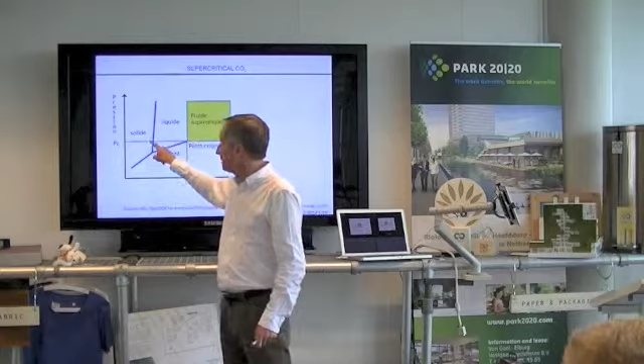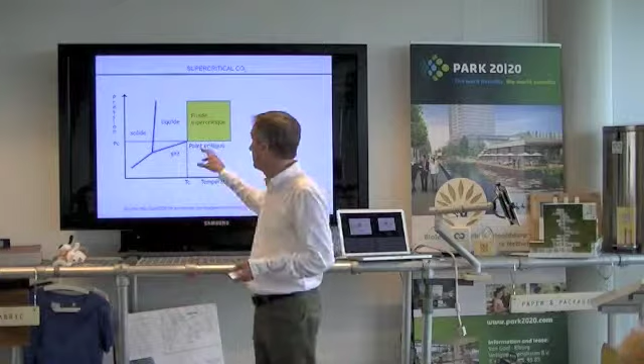Supercritical CO2 is—I'm sorry for the French, but we first explained this in Paris and I haven't had a chance to translate it yet. So this vector is pressure and this vector is temperature. At a pressure of about 72 bars and a temperature of 31 degrees Celsius, which is basically just a warm day, CO2 takes on a unique characteristic that is halfway between a gas and a fluid. That's called supercritical, because it reaches a critical phase. And something happens to CO2 when it becomes supercritical.

It becomes a wonderful solvent and a wonderful lubricant—a fantastic product. Because of that, it is being used now to replace toxic solvents in all kinds of cleaning processes, for example. There are literally hundreds of uses for supercritical CO2, and not just in the chemicals industry.

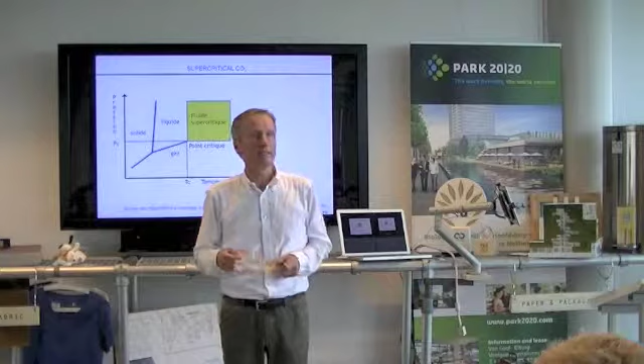It's also used in the energy industry, because when you pass through the supercritical point, you have a thermal transition that allows heat exchange, which means you can use supercritical CO2 to store and use energy. So imagine the implications for the solar and wind industries if you can store the energy generated when people don't need it, and get it back using CO2 as a storage medium. So we're using a climate change gas in a closed cycle to be able to store and reuse energy from renewable sources. All right, so that's supercritical CO2.

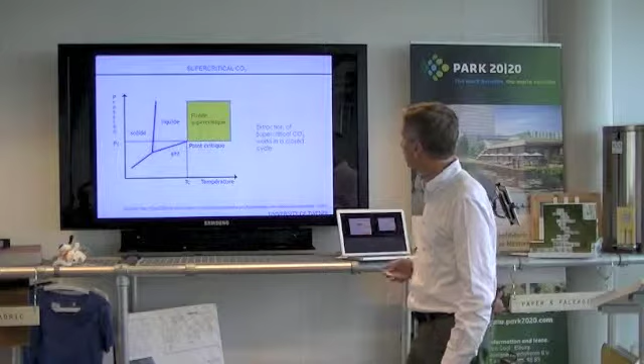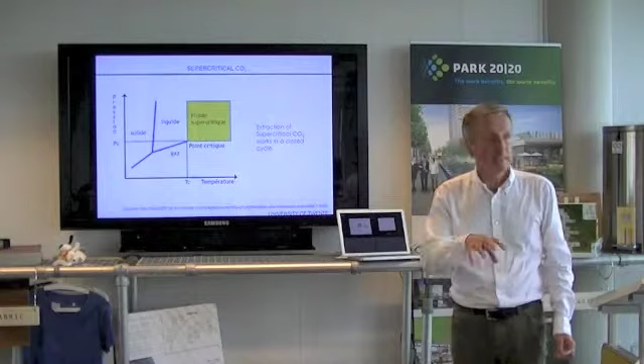And it works in a closed cycle, so that means it becomes a technical nutrient under cradle to cradle. It operates in a closed loop, and what that means is we can capture it and keep it without releasing it to the atmosphere.

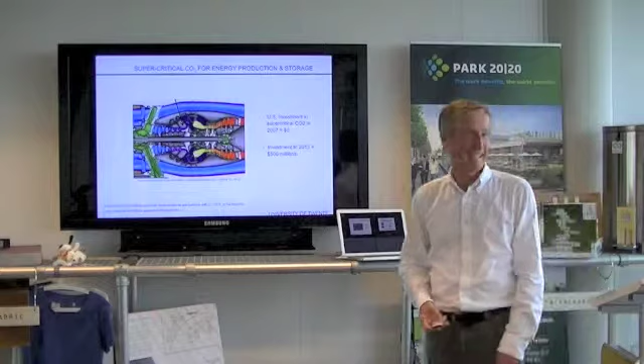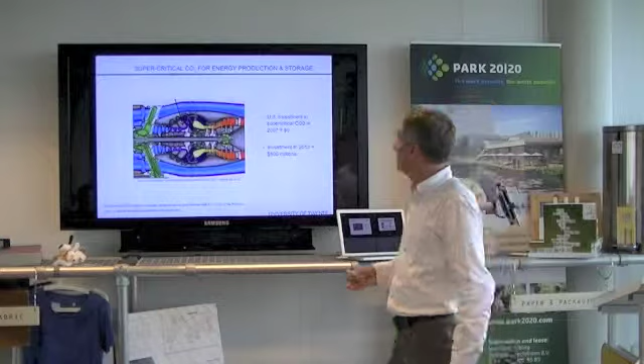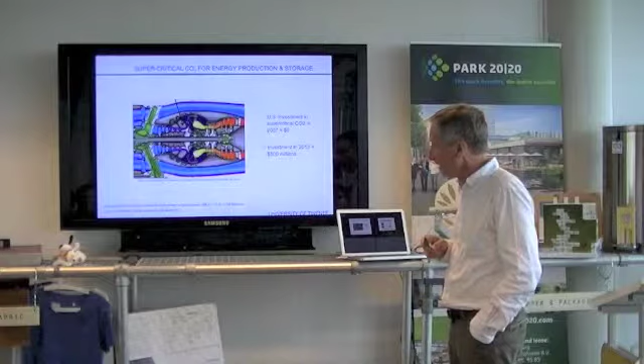People look at that and say, no, no, no, that's not true, this can't be, it's impossible. All right, so from the energy point of view, this is not the diagram of the human reproductive system. These are not kidneys, right? These are combustion chambers. This is an actual working model of a turbine manufactured by Sandia Laboratories, and it's coming commercial this year.

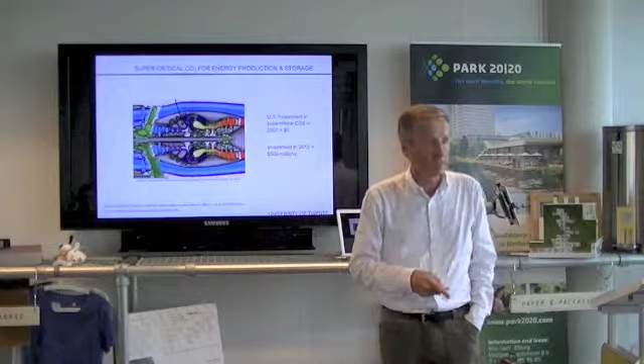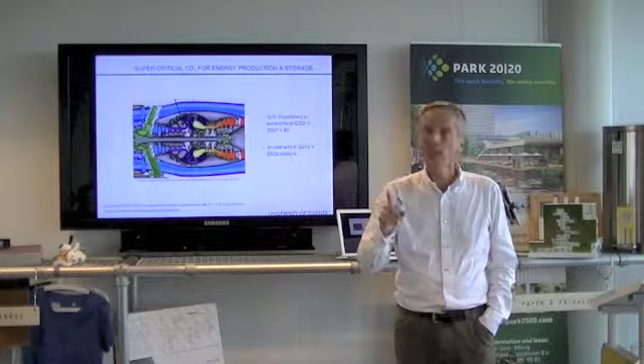Now, why is it so important? Turbines are the number one way that we generate electricity across Europe. Whether it's from nuclear or gas or whatever, it all goes through a turbine to generate electricity. So turbines are basically what everything is running off of.

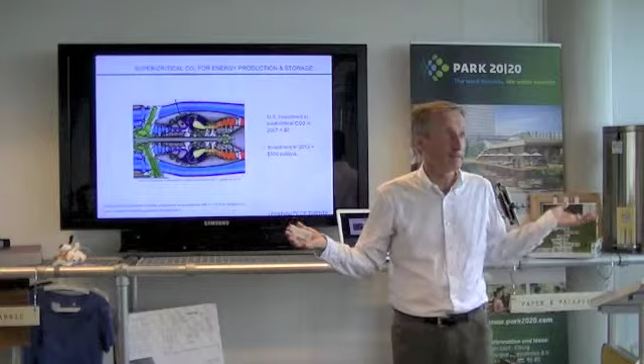When you replace gas with supercritical CO2 in a turbine, you reduce the physical footprint of the turbine by 90%. In other words, you're generating the same power for 10% of the footprint. Think about that just for a moment. It's an amazing development. Now, why is that?

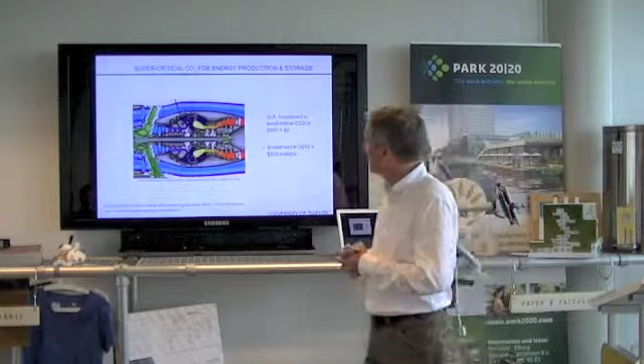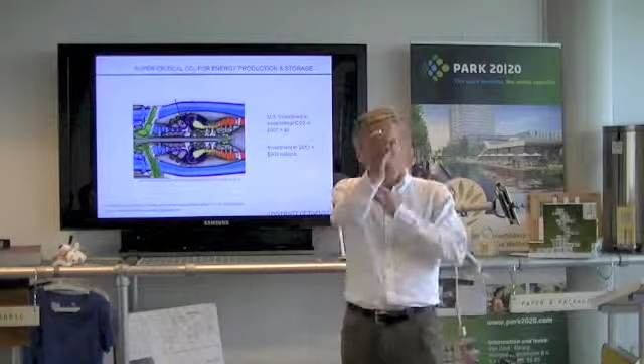The reason is because supercritical CO2 is an excellent lubricant, so it just goes through that turbine like grease, like oil, straight through it. And also it's quite heavy compared to gas, so it has a lot of inertia to it, which makes the turbine run with a lot more force.

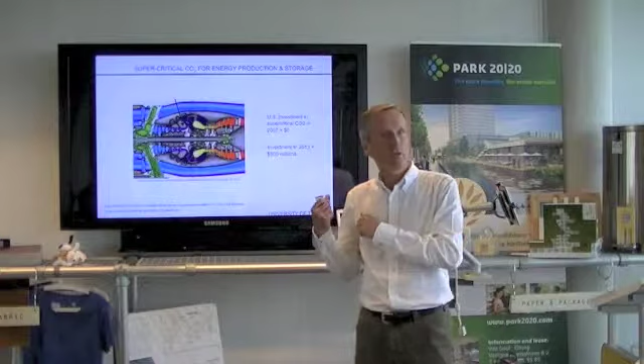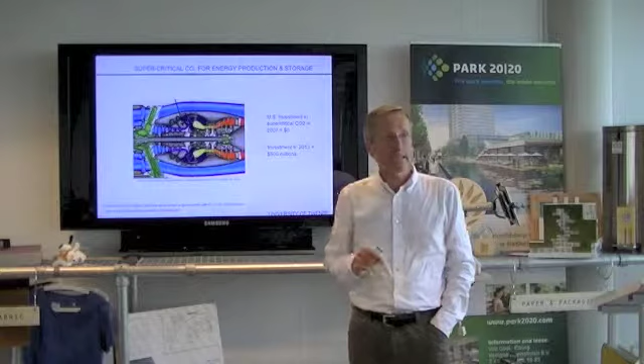That's what's going on right now in the marketplace. This is entering the market at the end of this year. So this means we can start to use CO2 to greatly increase the efficiency with which we generate our energy. When you put this whole story together, you begin to see a potential solution to our climate problem. And the solution is CO2.

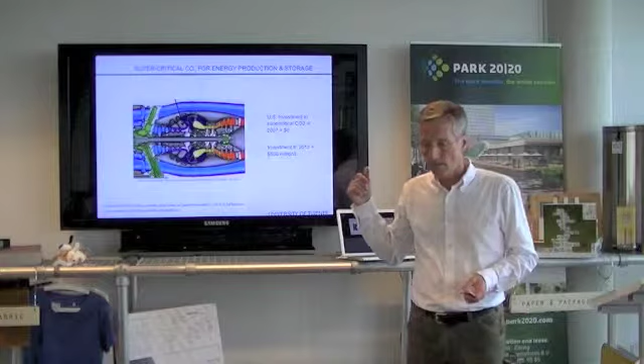Question: what is the product that comes out? Well, it's like everything else. It's not like a jet turbine, it's a closed cycle turbine. So what happens is the CO2 goes through the generator and comes back and gets reused again. It's all done in a closed cycle.

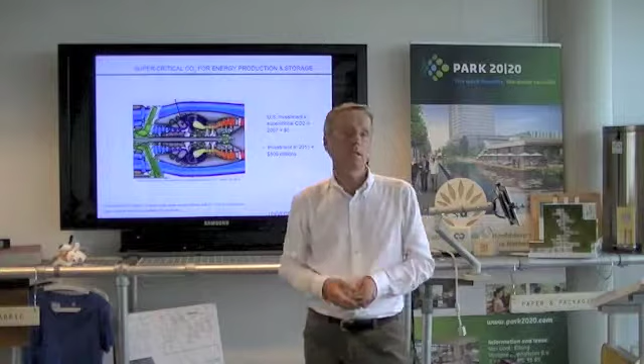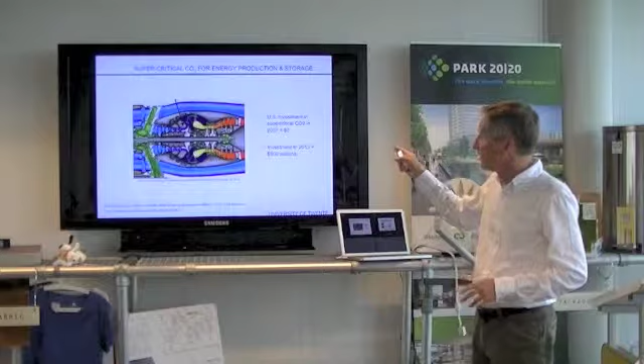Oh, and sorry, by the way, just to show you how fast this is moving: in the United States in 2007, there was no investment in this technology. Last year, they were investing $500 million a year. So it's just going like this.

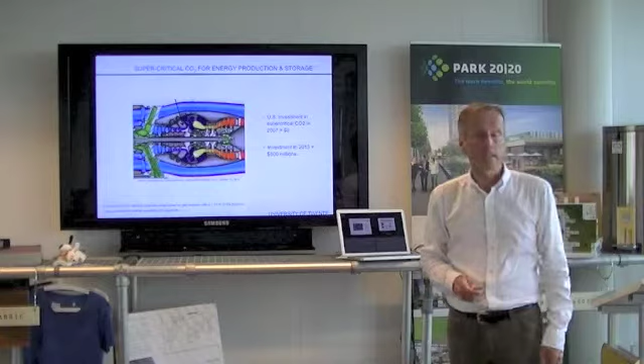How does the CO2 stay in this supercritical stage? It doesn't have to — that's the advantage. What happens is that as gas goes through the turbine, it expands, so you lose your supercritical state, but not sufficiently to cause a problem, and then it gets recirculated and brought back into the supercritical state.

Yeah, but my question is about, you have CO2 in the air from pollution, and you have to bring it under pressure from 72 bar. That's correct. So there's energy needed for that.

Good, very good question. So the way this is being done profitably right now is Mitsubishi Heavy Industries has developed a CO2 recovery technology for the chemicals industry, which allows them to recover the CO2 and sell it as a product at market prices.

I appreciate you asking this question because it's one of the most important ones. What we're doing right now with carbon capture and storage is saying, oh no, you can't do that, it's too expensive. As you know, the experience in the Netherlands was they tried it a few years ago and tried to get Dutch taxpayers to pay more than one billion euros for CCS. Your former Prime Minister was even brought out to sell everyone on the concept. But the Dutch taxpayer had sense and said no thank you, we're not going to pay for this. It's ridiculous, and they were right.

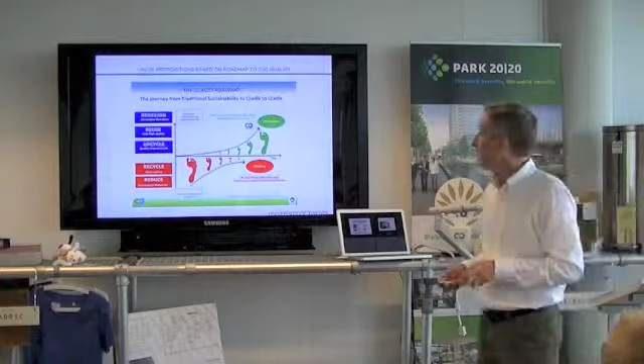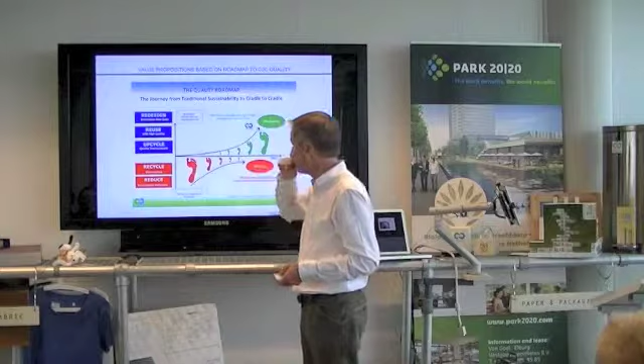So all of those examples I just gave you are based on this part of the graph. The reason I want to show you this is because some of you have seen it before, but some people have the idea that all of this is cradle to cradle, and it's not. This is shown to illustrate eco-efficiency, okay?

And it includes recycling, which today is basically downcycling, and it includes reducing your negative impacts. This is to show that there are transition technologies that can bring you up to being less bad, giving you some leverage to get onto the positive side.

But to be clear, the cradle to cradle part is here, not here. So the reason I say that is because a lot of companies think, oh, we're reducing our negative footprint, so we're cradle to cradle. No, sorry—you have some nice transition technologies, but that's not cradle to cradle. The cradle to cradle part is up here: redesigning with innovative new uses, reusing at a high level of quality, and upcycling the quality of your materials.

So I'm going to give you an example of this with supercritical CO2. You might have a coal generating facility where you can use supercritical CO2 to store excess energy that isn't used, meaning you may not have to build another coal generating facility. That's what we call the transition technology.

So the first thing is, let's at least try to slow down this massive construction going on right now of coal burning facilities by using these types of technologies for energy storage. But the true cradle-to-cradle application is, if you have a windmill, as you do across the Netherlands, generating a huge amount of electricity that goes into the air because no one's using it at certain times of day and night—imagine what this will do to the efficiency of windmills. If you can use supercritical CO2 and these types of generators to store and generate energy, the cost effectiveness of your wind energy is going to go up considerably.